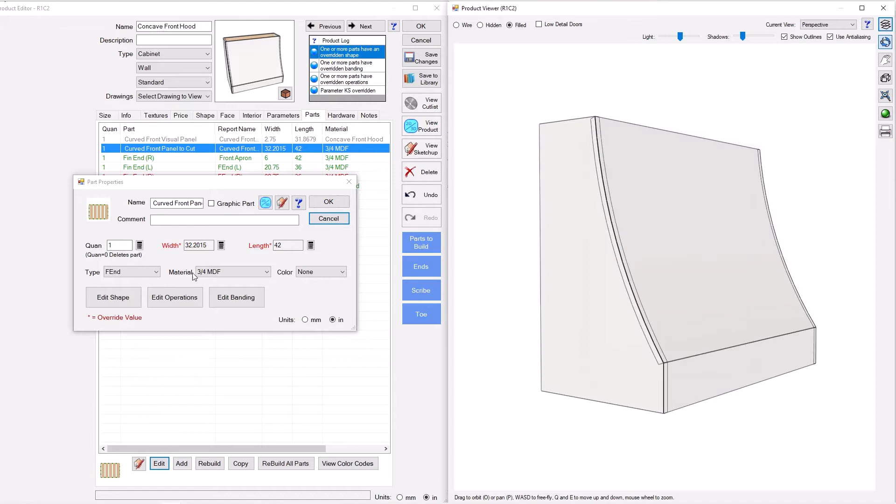And the coolest part is you can see here it says curve front panel to cut. Well, let's turn that on and take a look at it. And there it is. And so we're actually going to show how to make a pre-mitered, pre-kerfed panel straight off your machine to fit this curve. And you'll be able to assemble this right off your CNC. Let's do it.

All right, we're going to continue on building on our hood. This is part 2 of the video. If you haven't watched part 1, go watch that first.

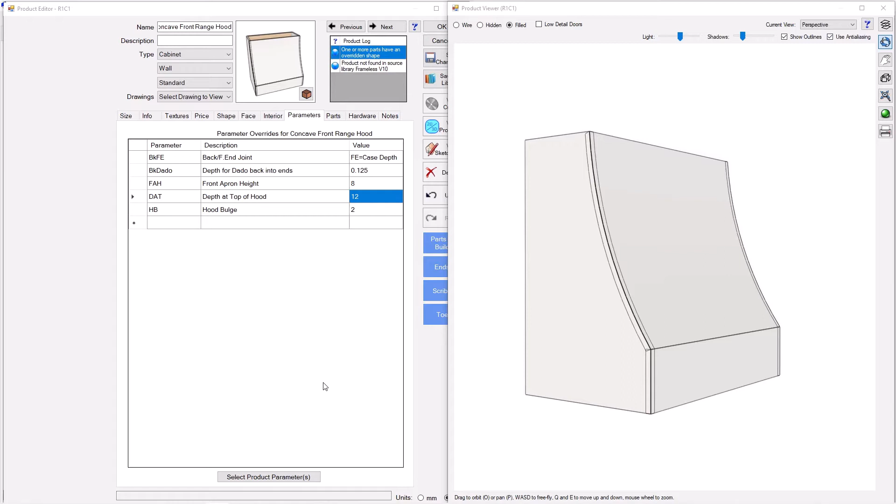All right, so we built this structure in part 1, and so we're going to take it the rest of the way. We're going to add some miters to certain edges of our parts, and we're going to add a back cutout, and then I'm going to show you how to actually kerf a real panel so that you can assemble this hood right off your CNC. So let's do the back cutout first.

So to do that, I would like some control over that cutout. And so what I'm going to do here is call something back cutout width. And what that's going to be is really the border around the outside, how much material gets left when I cut out the middle. And so we'll call this back cutout border width. We'll go ahead and do 4 inches there.

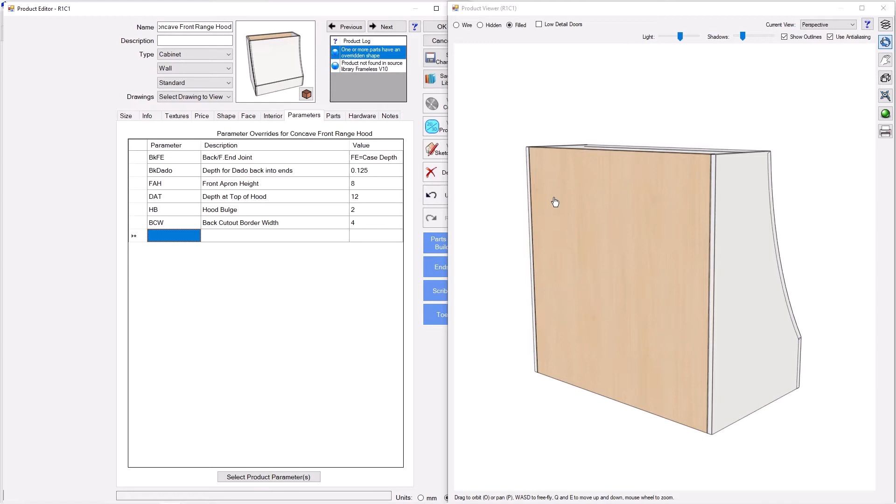Now, whenever we use a closed toolpath that we can add at a part, in order to get a true 4 inches, we actually need to do a tool offset. We actually need to build in our own offset. And so I'm going to go ahead and type in tool D as a parameter here and call this cutout tool diameter. And I'm going to use a 3/8 compression for that. So we'll go ahead and do that. So we're going to use these two now to make the cutout in the back.

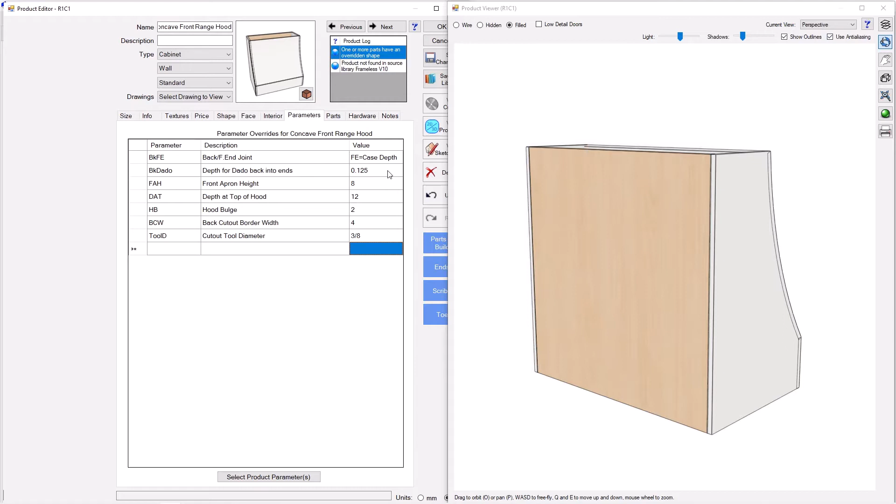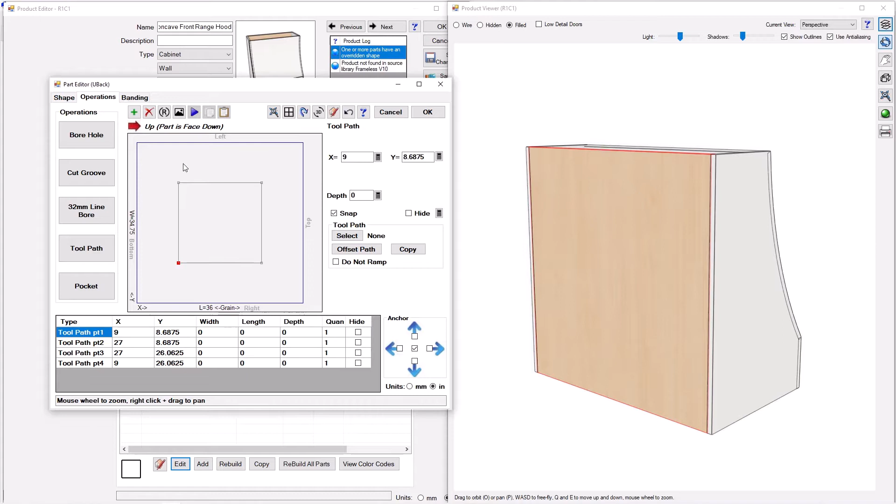So let's go ahead and go to parts. I'm going to go ahead and find the back, and press edit, and edit operations. And so you can see there's my back. And what we're going to do is we're going to add a tool path. And this is going to be a closed tool path. And we're going to essentially use the parameters we just made to define this cutout. So before we do the XY, we'll do the depth, and I want this to cut all the way through. Now this is a U back, so we'll do U back thickness there. We'll go ahead and select our tool, and we want this to be our 3/8 compression.

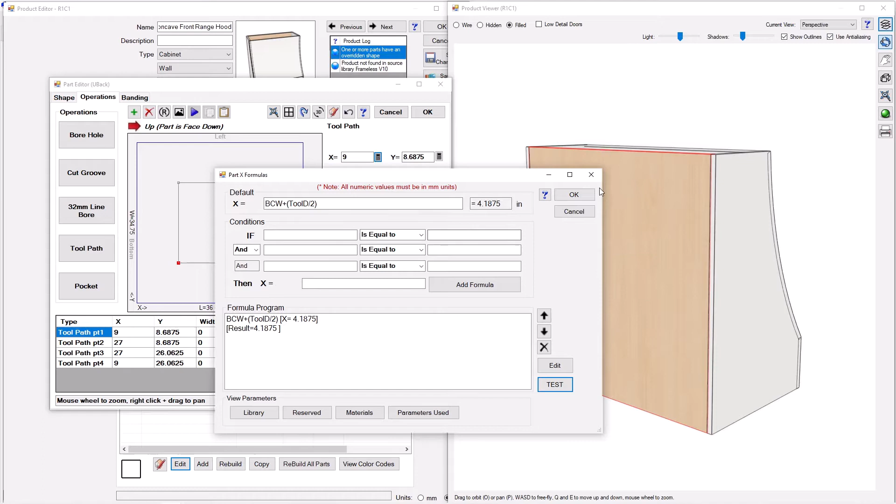Now for the X position on this, we're going to go ahead and use our parameter, BCW, back cutout width, which is 4 inches currently. But we also need to add in our tool offset, because really the tool path needs to be in the center of the tool. And so we need to add half of the tool's diameter to our coordinate. So there we go. So we should see 4 3/16, and there we are. Go ahead and press OK. In the Y direction, it's actually the same, so I just copied and pasted it. And there's our first point.

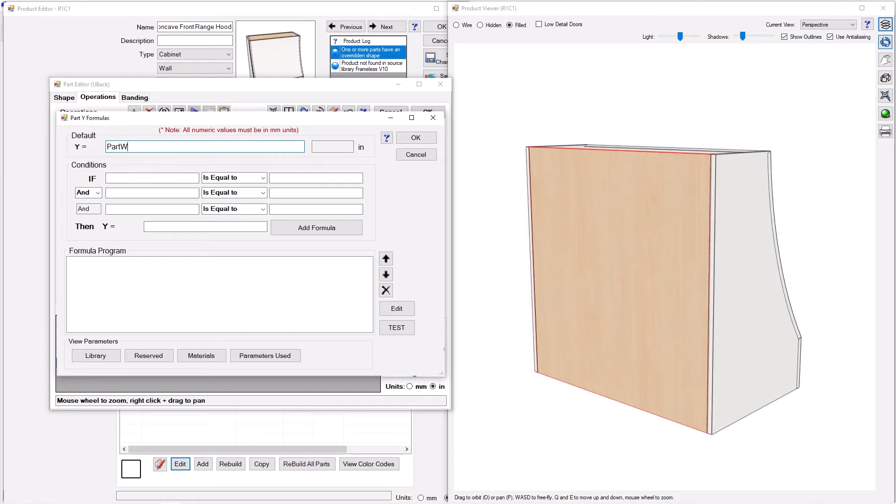Our second point in the X direction is actually going to be the part L, full length of the part, minus what I had copied. So I'll go ahead and do that. And the Y coordinate is what I've copied. There we go. Now point 3 is going to be part L minus, there we go. And Y is going to be part W minus everything I've copied there. So really we've used this same expression at every point. There we go. And then point 4, this one is what we've copied. And this one will be part W minus what we've copied.

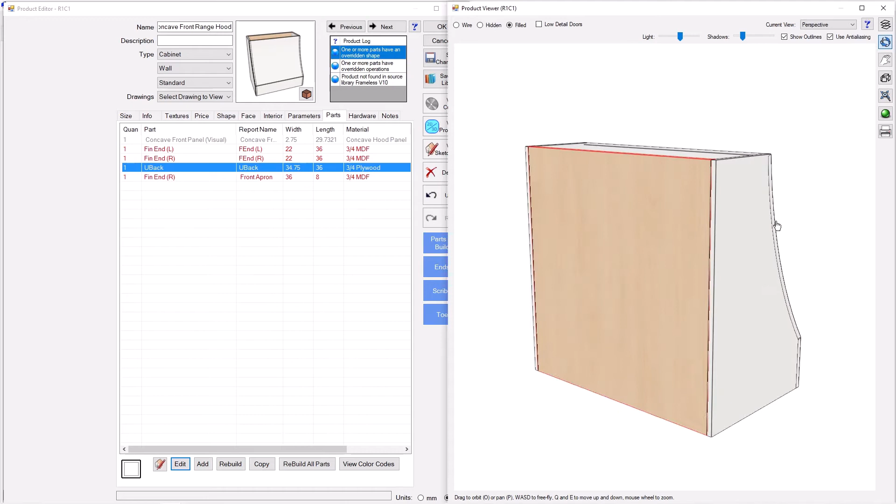There we go. All right, so we just made a parametric cutout. And it's actually going to give you a true 4 inches when we're done because we built in the offset of the tool. Go ahead and press OK. We'll press OK here. Now you don't see it here. You can see it on the inside. In order to actually see your cutout, we do have to turn on high detail.

And there it is. Now we can change that to whatever we want. So we have full control over that cutout now. And we could make multiple parameters and shape this cutout however you want to. We'll stop right there for the sake of this video. But there's your cutout.

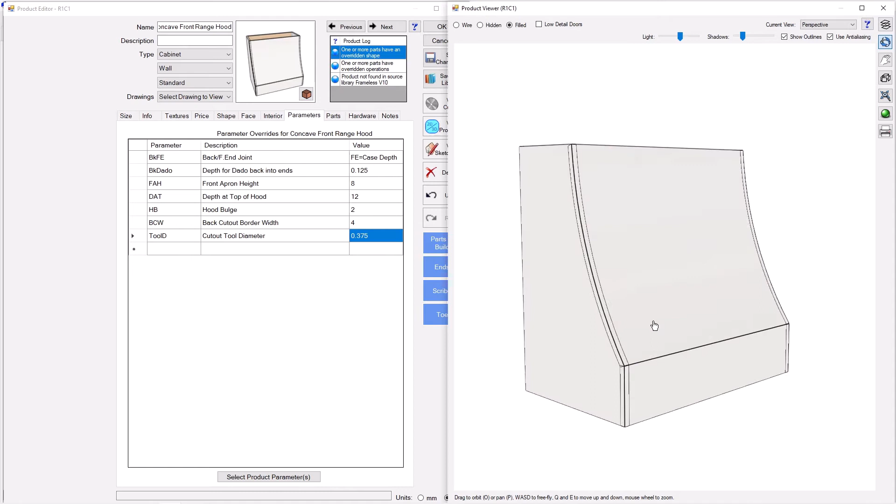All right. The next thing I want to do is I want to miter this edge on our end and this edge as well. I want to miter the ends on our apron, and I want to miter these ends right here. So here's how we're going to do that.

I'm going to go to the Parts tab. I'm going to find the finished end left. I'm going to go ahead and press Edit, and I'm going to edit operations. And I'm going to go ahead and add a toolpath, but this one is going to be an open toolpath. And you can see there it is, but really I just need 3 points, not the 4 that it comes in with. We just need 1, 2, 3 to follow those 2 edges. So we're going to go ahead and delete that one.

On toolpath point 1, I need that to be right here. And so our X coordinate here is 0. And our Y coordinate here would be part width, full width of the part. You can see it'll bring it up here. And while we're on point 1, we're going to go ahead and set the depth. Since this is a finished end, we're going to go ahead and write finished end thickness. Okay. And we're going to select our miter tool, our 90-degree sharp corner miter tool. This is the same tool used in the miter fold library, and so that's what we're going to use here.

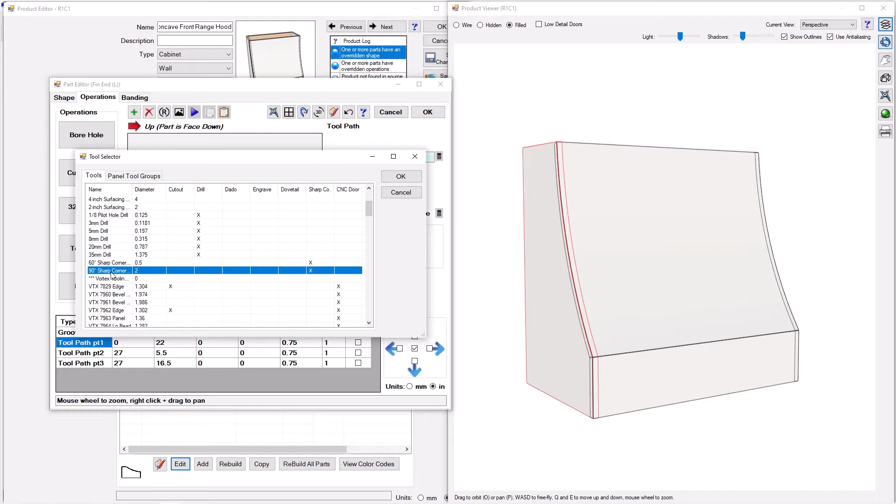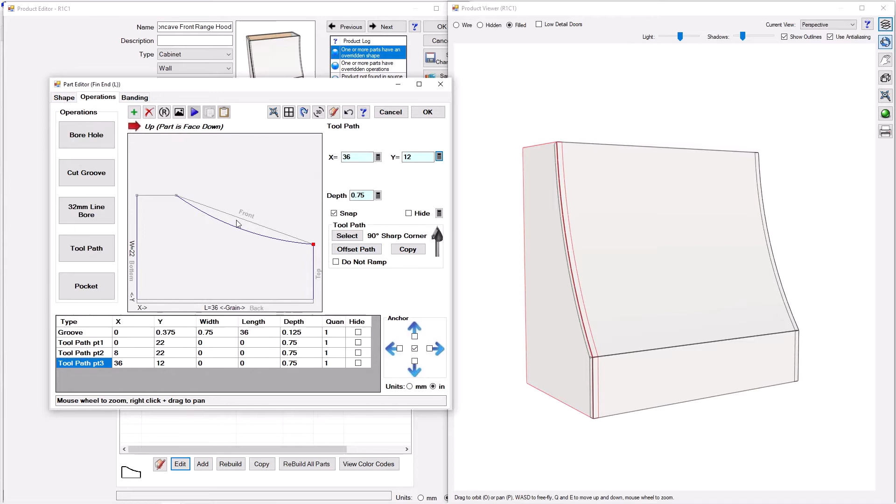There it is. Now on point 2, our X position should be our apron height, FAH, and the Y position should be part W. There we go. And on the third point, we need this to be the full length of the part, part L. We'll bring it all the way to the right. There we go. And here, this will be the depth at top parameter. And there we go, right on that point. Then we can click on this line and we can add our bulge. Go ahead and go HB.

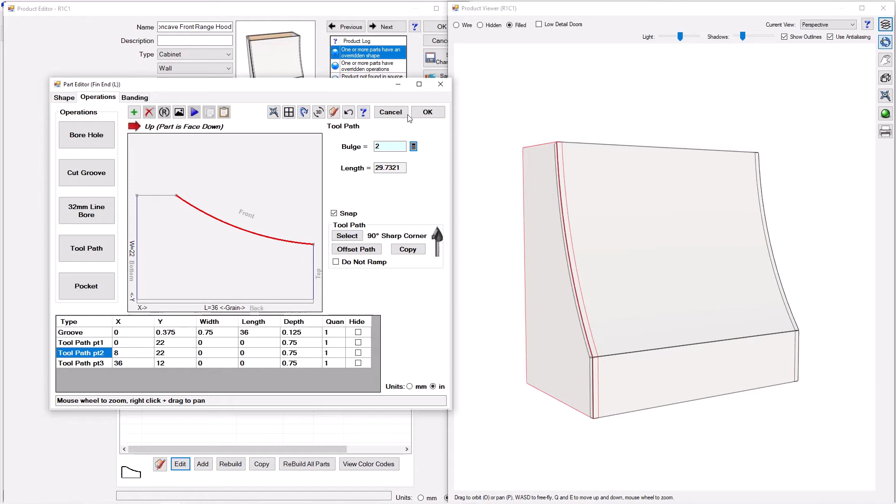There we go. So now we essentially have a miter toolpath that will follow the shape of our end. And so we can miter this to essentially the apron in our curved part. Go ahead and press OK there. We've got that one done. Now we'll do the front apron.

There it is. We're going to go ahead and go to Edit. I'm going to edit operations and add those miter toolpaths. So I'm going to go ahead and add a toolpath. It's open. And I'm going to go ahead and delete point 4, and I'm going to go ahead and delete point 3. Okay. So for point 1 here, we want this to be at 0 and 0 down in the bottom left corner. While we're here on point 1, I'm going to go ahead and put the depth to be finished end thickness. Again, I'm going to select my miter tool. There it is.

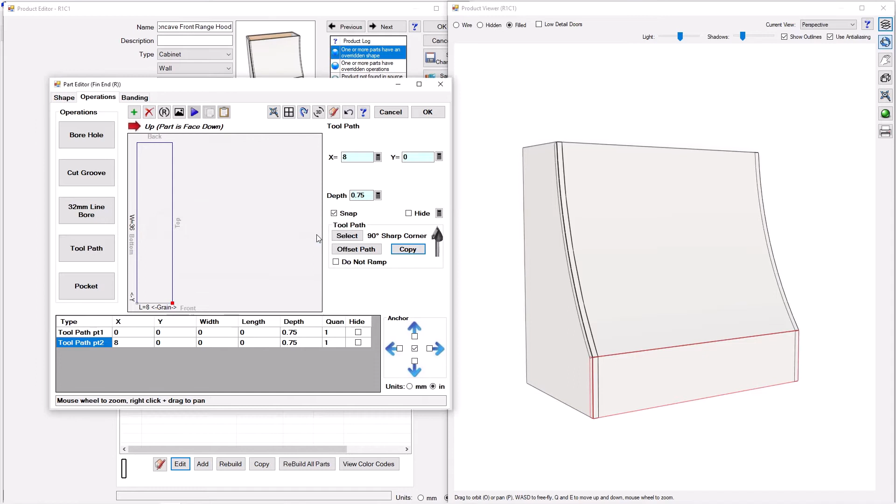Go to point 2. We want this to be all the way to the right on the part, or part L, and our Y coordinate to be 0. And there we go. We mitered this edge of the front apron. I'm going to go ahead and copy that toolpath. There it is. And we're simply going to move the Y coordinates from our copy. And this, instead of 0, will be part W, which will move it all the way to the other side of the part. And we'll do the same with point 2. All right, so we've mitered both sides.

Now, we can do the right end, but for the sake of keeping this video as short as possible: you can do the right end simply the same way you did the left end. And that way you would have a miter line right here on these 2 edges of your right end. So the last piece is, how do we actually add the panel the machine's actually going to cut with miters and kerfing to actually fit this concave shape.

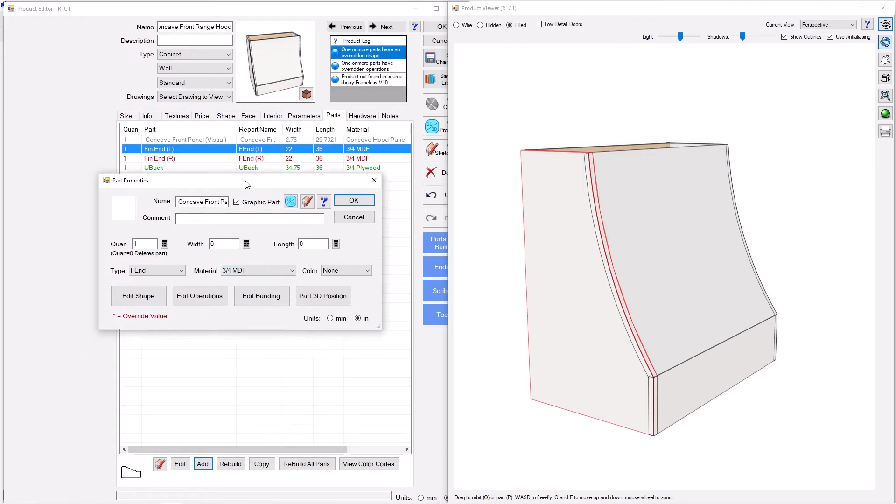And so what we're going to do is we're going to add a part. I'm going to go ahead and call this concave front panel, and we'll call this actual. And this is actually going to get cut out of the finished end material. I want this to be out of MDF. There we go. Okay, now in terms of the shape, the width of this right here, the width of the hood, I actually want to be the length. You could do it either way. But we're going to go ahead and type in W there in length, and it'll pull the 36 dimension.

So that's good. Now, in terms of the width, this is a little trickier because what we need is the arc length right here along this concave surface, because ultimately I want my part to be long enough that when it fits this curve, it's a perfect fit here right to the top corner and right to this corner here. Now, to save us a bunch of time, I'm going to actually use a formula I've put together in advance. You can see how intense this one is to figure out the arc length from our parameters.

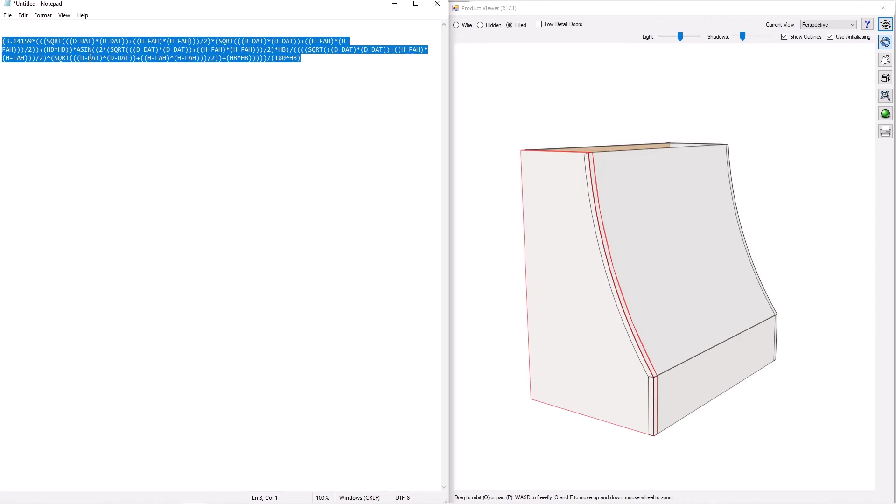I'm just going to copy this, get rid of that. And that's ultimately what's going to go in the width section here. We can test that. And there we go. And press OK. And so there's the panel right there.

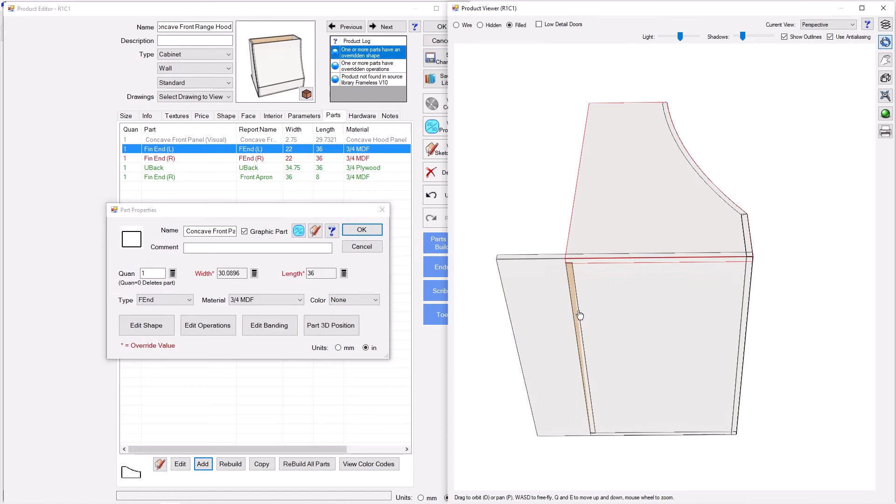Now, you're going to want to uncheck graphic part when you use this hood for real. So ultimately, you can see the visual, but this part will actually get cut on the machine. So we'll keep graphic on so we can see it. But that part right there will be long enough to fit this arc right here perfectly. All right, so let's miter this part. We're going to go ahead and go to Edit Operations.

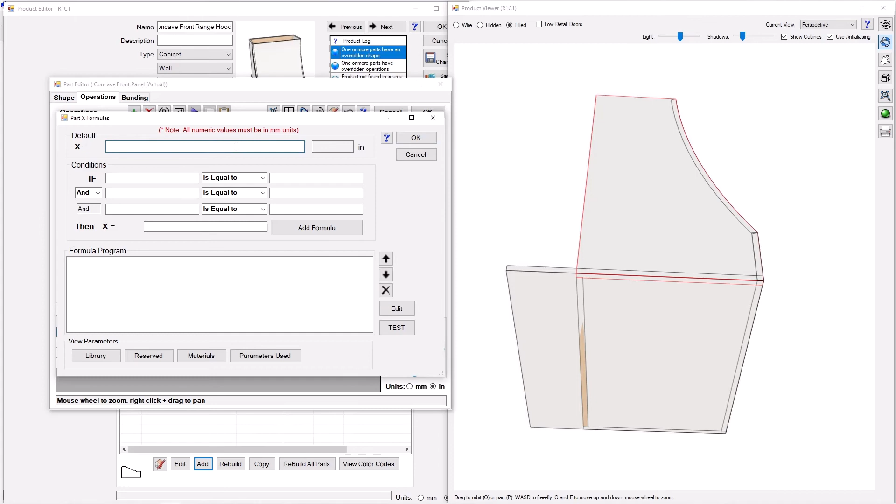I'm going to add a toolpath. It's going to be open. And really, I just need to follow this edge, which is the edge that's going to follow the concave surface, this edge, which meets the front apron, and this opposite right edge here. So with point number 1, we're going to bring that all the way over to 0 in the X, and all the way up to the top with part W.

Okay, while we're on point 1, I want this depth to be the full thickness of my finished end. And my tool is going to be the 90-degree sharp corner tool. There we go. Point number 2 is going to be down at 0, 0. All right. Point number 3 is going to be part L all the way to the right of the part. And Y will be 0 down at the bottom. There we go. And our 4th point is going to be all the way over and all the way up.

All right, so now essentially we're going to miter 3 edges of this panel, and that's what's going to allow us to essentially kind of fold it in and assemble this hood. Now, the last piece is kerfing, and how do you do kerfing in Mozaik? So the way to do that, I'm actually going to close this here, is I want to make some parameters to control my kerfing. And so one of them is going to be KD, or the kerf depth. And we'll start with, I don't know, 5/8, leave an eighth of material.

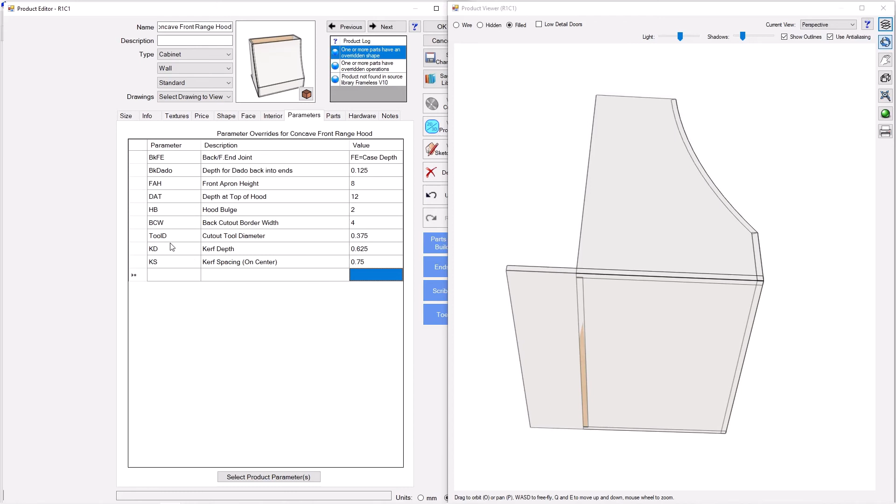And then we're also going to do kerf spacing. KS. And this will be on center. We'll just say 3/4. This is something you're going to have to play with to get kerf spacing and depth that you like to get a nice smooth curve, but that's something you'll have to test out. So let's go back now to our parts tab, and we're going to go back to the actual panel. I'm going to press edit. We're going to go to edit operations here, and you can see my miter lines.

What we're going to do here is we're going to add a tool path. It's going to be open. I really only need 2 points, so we're going to delete the 4th point, and we're going to delete the 3rd point. And what I need here is in the X direction, 0 all the way to the left. And our Y position is going to be KS, our kerf spacing. So you can see how we're going to be able to control these tool paths with our parameters, or at least their positioning. So there's KS.

Now while I'm on point 1, I'm going to set the depth. And this goes back to KD, our kerf depth parameter. There it is, 5/8. And I want to do this kerfing with an 1/8 inch down shear. We'll go ahead and press OK. All right. Here's toolpath point 2. We're going to go all the way to the right, part L. And this will be kerf spacing KS. There we go. So there's our first kerf line.

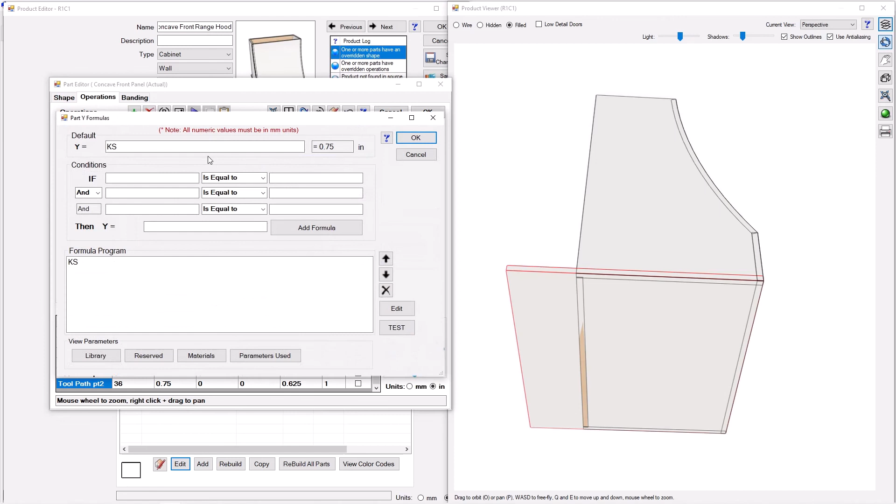Now, this next process, there's no way to speed up. Unfortunately, it's going to take you 5 to 10 minutes to do this, but we're going to have to copy this toolpath, press OK, press OK. And on this new toolpath, all we're going to do in the Y position is we're going to start going up by 2 times 3 times 4 times 5 and create each one of these lines. So there we go. Times 2. All right, there's kerf line number 2.

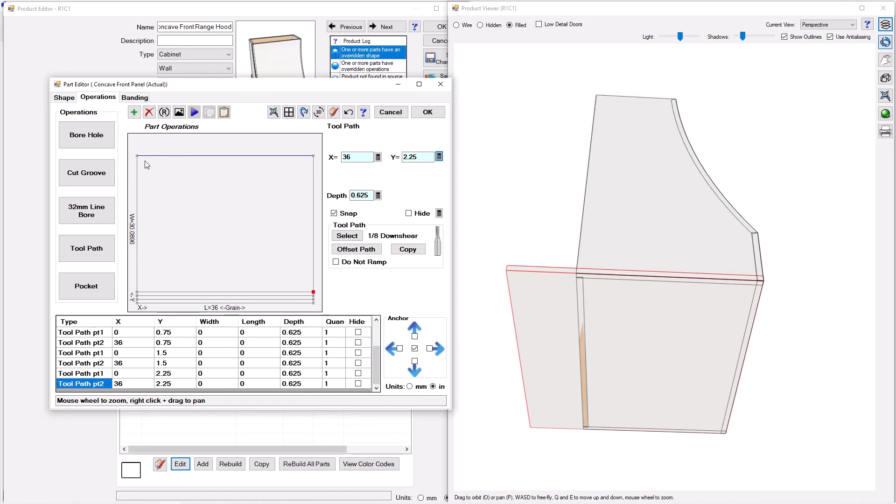We'll go to copy. And you can see how you're just going to have to kind of rifle through these. So the next one would be spacing 3. So on and so forth. So I will stop there. You will essentially need to fill your part with kerf lines. And if your hood changes, you may have to add some kerf lines, hide some kerf lines. We could make some formulas that they hide themselves, but that's beyond the scope of this video right here.

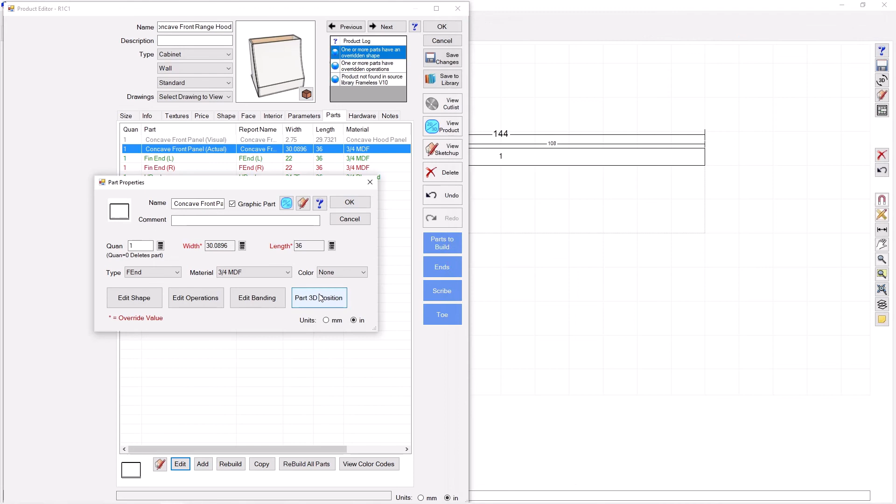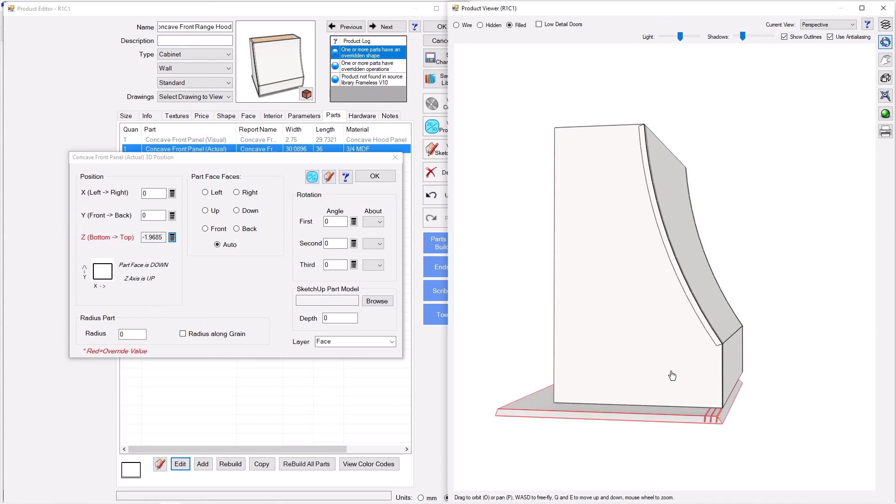So if I press OK and OK, I'm going to turn on high detail. And there it is. You can see my kerf lines there. I'm going to go ahead and move this down. There you go. You can see it now. We'll turn high detail on. There we go. So there's the start of my mitered kerf panel. That should perfectly fit. All right, give it a try. Make sure you do a test first before you cut this for real. But that should give you a perfectly assembled concave front hood straight off your CNC.